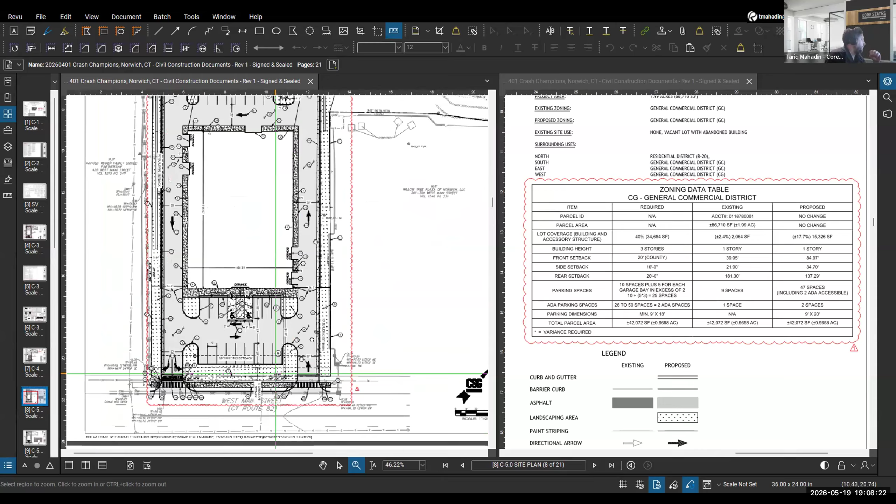Before I start, I'll give a quick brief on where we're at and what we're proposing. As you can see, the project is Crash Champions, a repair facility for vehicles. It's a retail business. We're proposing an entrance from West Main Street on the east side, and we're proposing the exit on the west side.

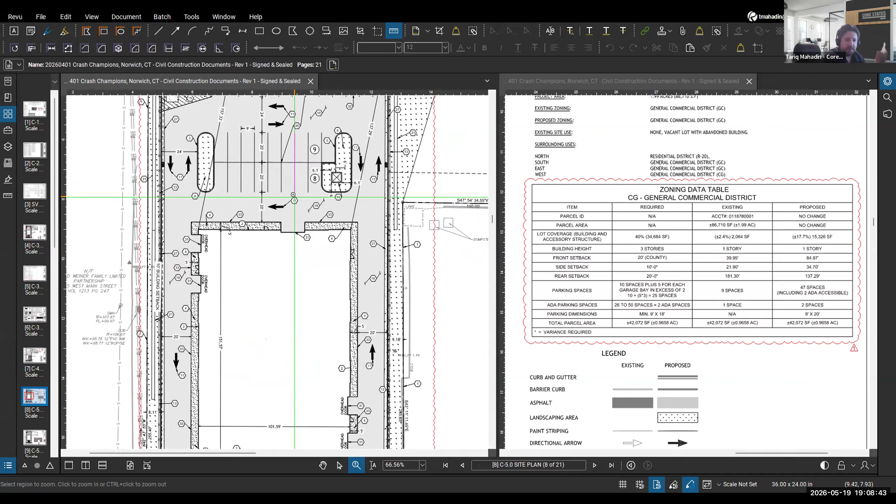We're proposing some parking spaces in front of the building, as you can see right here. And this is the proposed building. We have some parking in the back for vehicles being repaired or pending for customers to pick up. We will have some fencing, and we're proposing an underground stormwater detention system.

We started conversations with city staff about two months ago. They've been phenomenal, outstanding, and quick in communication, with constant feedback on the city codes and what's required. We received some extensive comments, very detailed and thorough, on improvements specifically toward aesthetics, landscaping, and the storm design system. We're still going over those and working on them. If anybody has any questions, please let me know.

We're expecting to resubmit our civil plans and landscape plans within 2 to 3 weeks. We've been back and forth mainly because of that underground detention system, and due to the existing soil conditions, we are revising the storm design.

Give me just a second, I need to share a different PDF, this is just the layout. This is a quick example showing how it was before. Our proposed system is currently extended and enlarged, as you can see here, and we're still working with the city engineer, Mr. Jeff Dewey.

If anybody has any questions, please let me know. Or Frank, thank you.

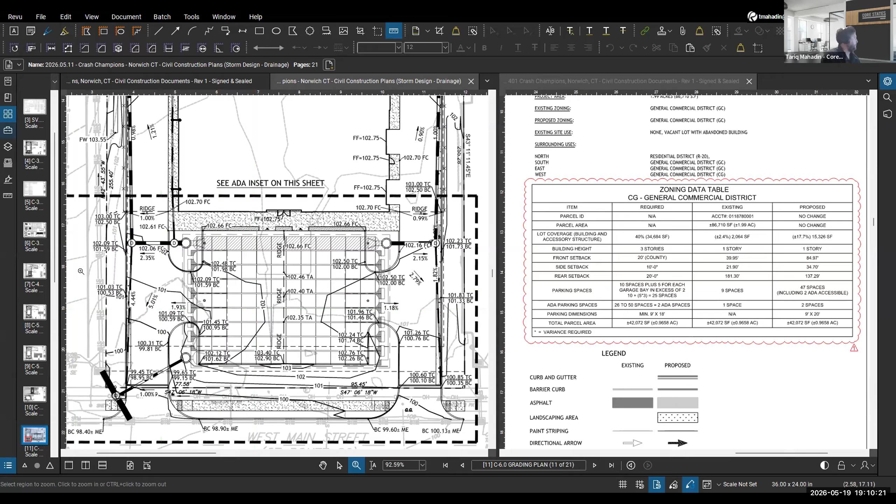Just quickly, this is the old Jiffy Lube place, correct? I believe so, yes. And here is the existing Jiffy Lube. I have a quick survey showing what we're trying to take out and how it's going to be more properly designed.

So I have a question - you said you have more revisions to make. So are you not ready for the commission to review this at this point?

Kathy: I can address that, go ahead Dan. Tariq: So we've had extensive meetings with them, myself and Jeff Dewey, and we're okay with the commission approving it tonight. They're going to address things post-approval that Jeff is okay with and I'm okay with at this point. We've had back and forth for 2.5 months now, and the main issue was the stormwater system. Jeff communicated with me that he's fine with it being addressed post-approval. And for the record, Jeff is a city engineer. Yes.

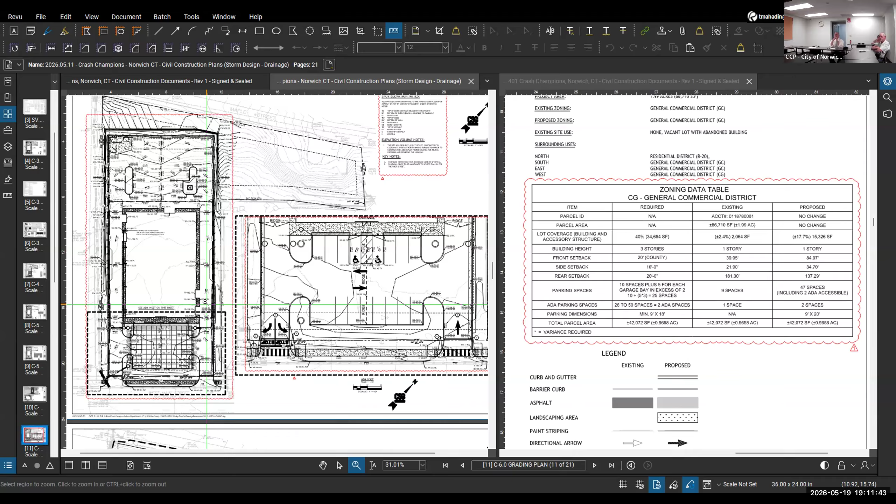Where is the employee parking?

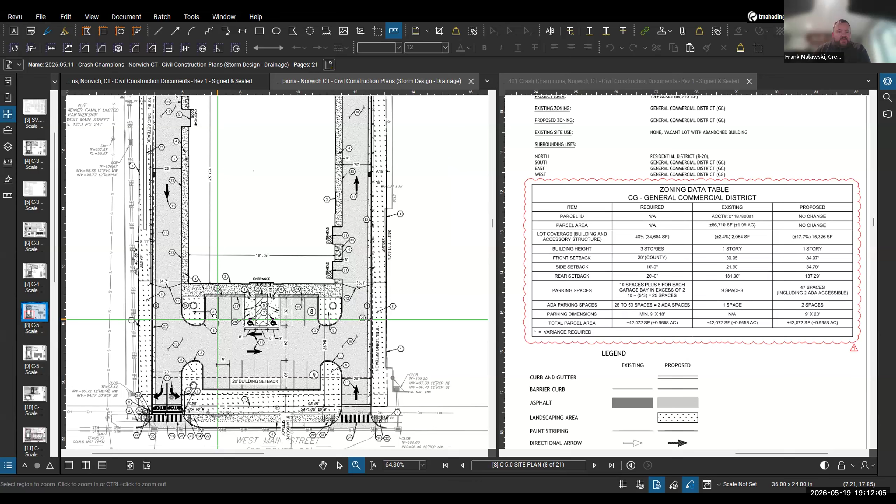Frank: Yeah, you want to take it? Definitely, employee parking is in the front of the building along with customer parking right there. And if you see the two gates on the left and right side of the drive aisles, that in the rear is the storage area. So if you could move up, Tariq, there's the storage for the vehicles in the back there.

Any other questions? Tariq, do you have the elevation views you could show the commission again? It's been a couple months now.

Actually, the architectural elevations. Yes. Frank, do you have those? Give me just a second here. I think I do, yes I do. I'm going to go ahead and share my screen if that's fine. Thank you.

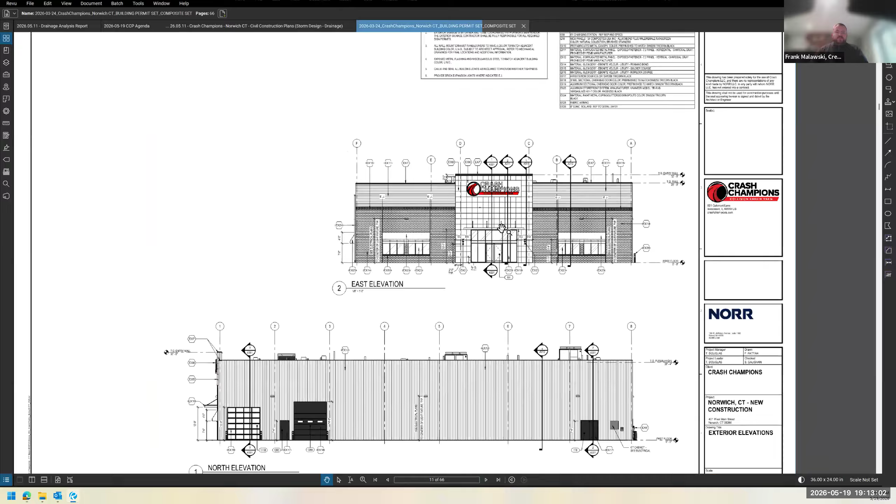So this is what the front elevation looks like. Everyone can see that? Okay, so that's the front elevation. It's a brick facade. And then the side elevation looks like that. And then the rear of the building, that's what the rear looks like, and the other side of the building.

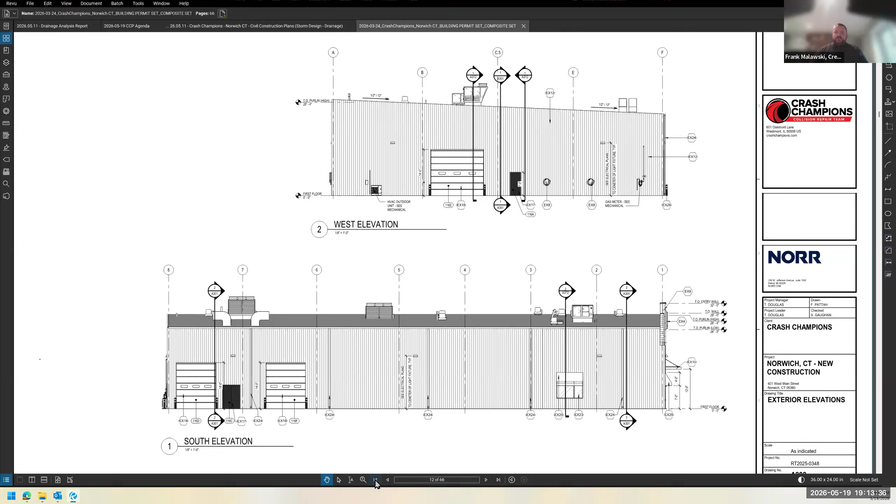So this is a tear down of the existing facility in a brand new building? Correct. And do you have the color for the sides of the building? The sides of the building are metal. Yes. Thank you.

This is strictly collision repair? Correct. The full list of services are aluminum, hail, dent, auto glass, auto paint, paint scratch, bumper repair, fender repair, paintless dent repair, windshield repair, and replacement.

Is there anybody else here to speak on behalf of the applicant, or in favor of this application? Is there anybody here who wants to speak in opposition to this application? Last time, is there anybody who wants to speak in opposition? Okay, hearing none. Staff, you got your report?

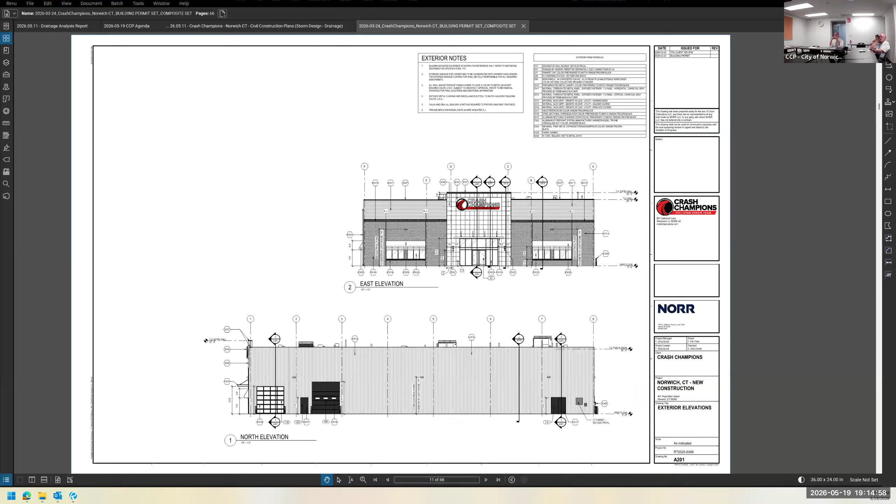Sure, give me one second please. So I'll just run through my memo real quick.

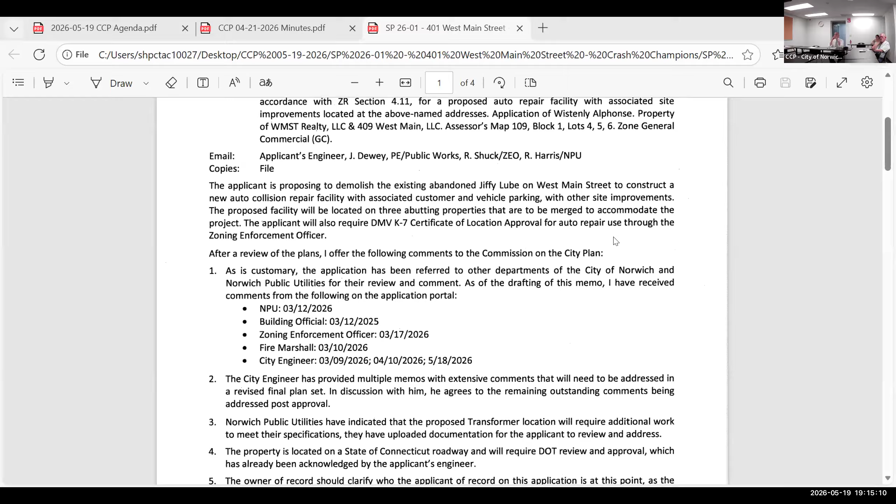We've had extensive back and forth with the application team. All comments have either been addressed at this point. There are a few outstanding that, as I mentioned earlier, the city engineer and I are both fine with them being addressed post-approval.

They are coordinating with DOT. Just one point of clarification: the owner of record needs to clarify who the applicant is on the application at this point, as the original applicant has been removed from the project.

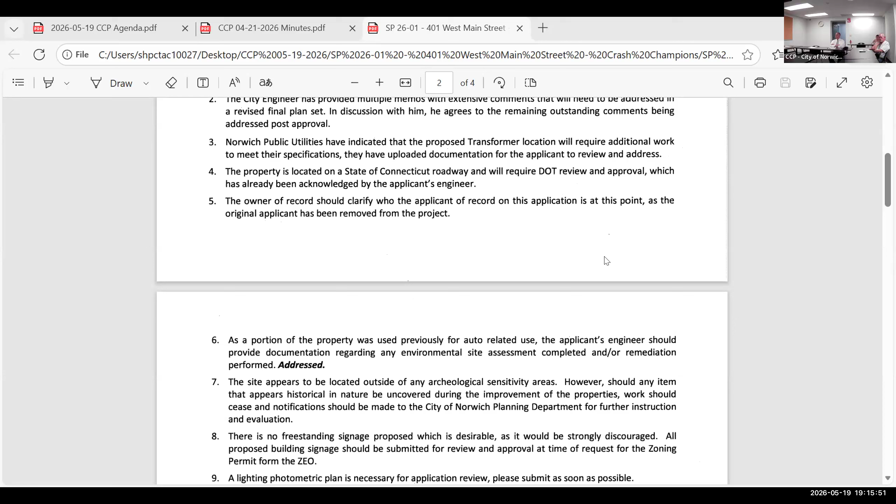I don't know, Frank. Oh yeah, it's going to be me. I'm so sorry, I should have told you that, Dan. Okay, if you could just send an email saying that, and then we can correct it in our portal. My apologies, I will take care of that.

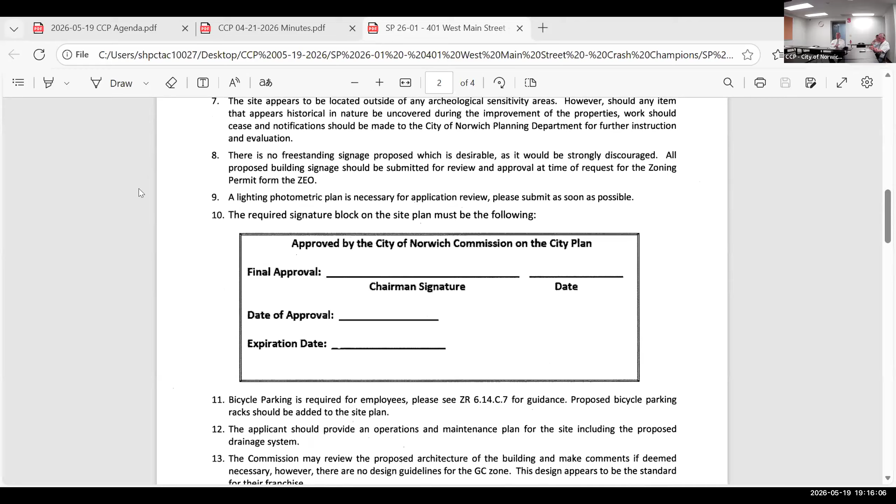Thank you. There's no freestanding signage proposed, which is desirable for the location and building layout. We need a photometric, and need to add some bike parking for employees in the back.

And then you're working on the drainage system, an O&M plan for that. The landscaping plan has been updated since the drafting of this memo.

I don't remember if you went through the 10 special permit criteria a few months back, so we should probably go through those again for the record tonight. And then I have some conditions for approval, so should someone make a motion, but I'll hold off on that. If you want to go through those criteria real quick, they are somewhat repetitive, so you can paraphrase -- you don't have to read verbatim every answer.

Can you do that, Mr. Mahadin? Can you go through those criteria? Yeah, I'm good with going over them now. Okay, just want to make sure. I can bring them up on the screen for you. Okay, got it.

Do you see that? Yes, I see it. Section 7.4.C.8. Yes, we are making improvements on that. Point 1, clear. And Frank, you can interrupt me if you have any comments.

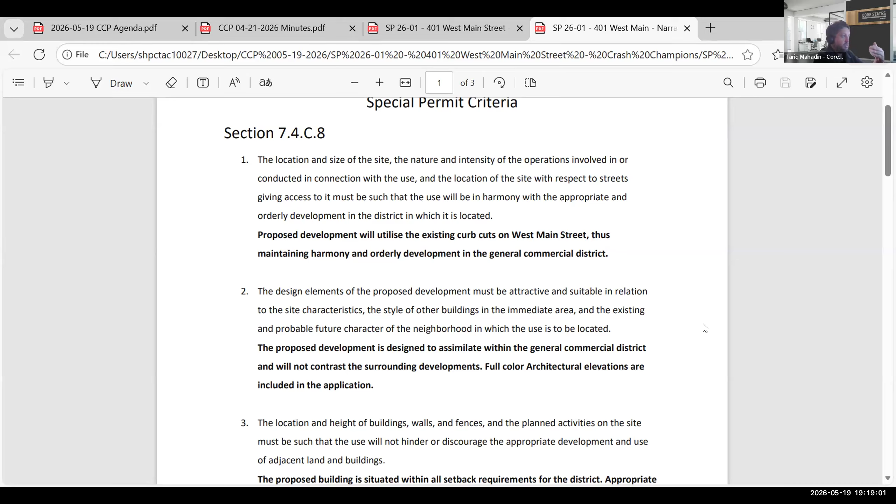Point number 3, the location and height of the buildings, walls, fences must be such as will not hinder or discourage appropriate development and use. We'll talk to the architects, Frank, about that to assure them that we have a proposed building that meets this comment. Yes.

It's appropriate. The proposed use or activity must have no adverse effect upon the neighboring area. No, we are not expecting that. There is no exposed artificial flashing, no loudspeakers, and no repairs will be conducted outside -- everything is going to be inside the facility. Is that correct, Frank? Correct, everything. And just a quick point for everyone: we have 2 bays accessing the site, that's why, to make sure all the vehicles are maintained inside. The design, location, and specific details.

Yes, the proposed development is eliminating one of the existing three curbs. The proposed use and activity will not adversely affect traffic. No traffic conflicts are expected.

Frank, do you concur with this? Correct. Existing and proposed streets, driveways, size, and condition have capacity to accommodate the proposed use. Yes, and we're also coordinating with DOT through the radiuses and driveway improvements using their state standard details.

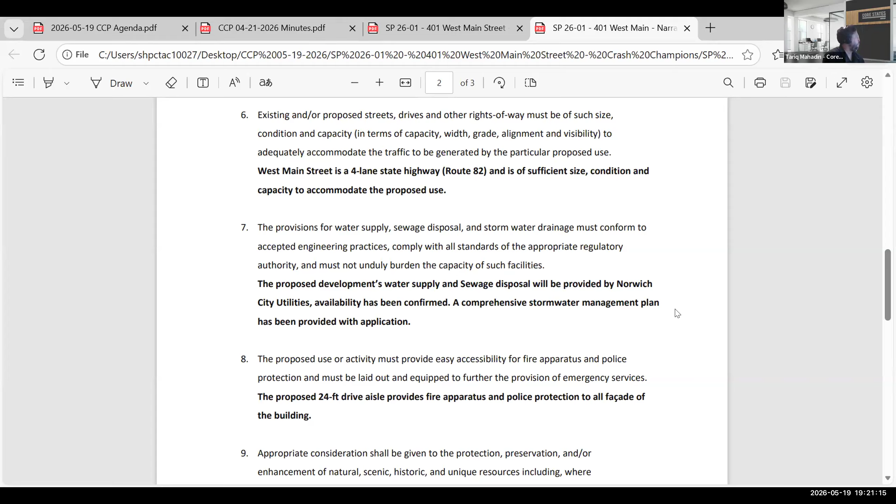Point number 8, proposed use and activity regarding fire apparatus. Yes, the proposed 24-foot drive aisles provide for fire apparatus. We're proposing approximately 24 feet and will make sure those are visible.

Appropriate consideration shall be given to the protection, preservation, or enhancement. This refers to the landscape architecture comments. One of the comments we received is not to focus just on the entrance - the city recommended we also look into the back of the property, and we are working on that too.

Point number 10, adequate provision and demonstration that the proposed development will properly maintain. Yes, the proposed development will be properly maintained to uphold the brand's image and reflect the City of Norwich standards. I concur and confirm. That's it. Sorry, I tried to go as fast as I can. No, thank you, that was great.

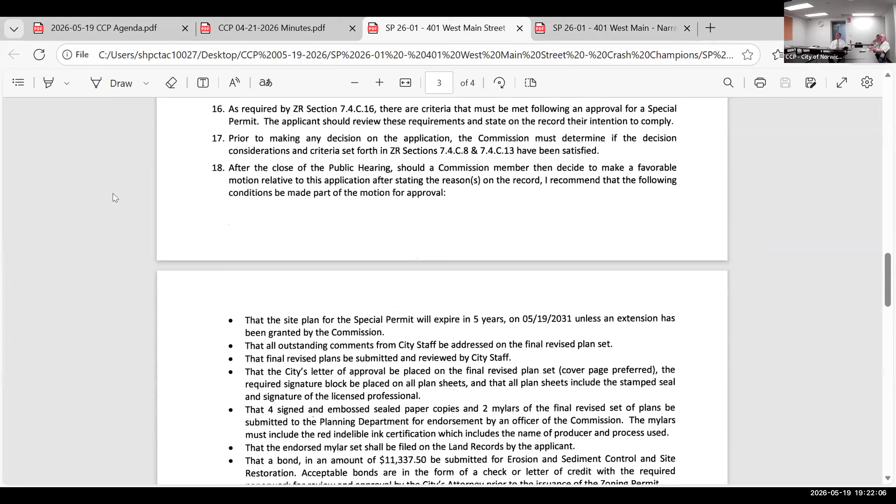Just back to my memo, I have a number of approval stipulations here that I have to waive the reading of, but I'll provide them to the clerk. For the record, I have some suggested reasons should someone make a motion for approval. I'll quickly show you the exhibit list so I don't have to read it, but it's on the recording and will also be provided to the clerk.

Switching back to the memo here, I would add one more item as part of the motion: this approval would expire and supersede special permit 23-09. If you remember, a few years back those of you on the commission approved a similar use here for the same type of business. It was a different company, a different group, but if this is approved tonight, it would supersede and expire that permit.

The design was completely different, so they wanted to come back and move forward. All right, that being said, I think we can probably have a motion to close the public hearing now.

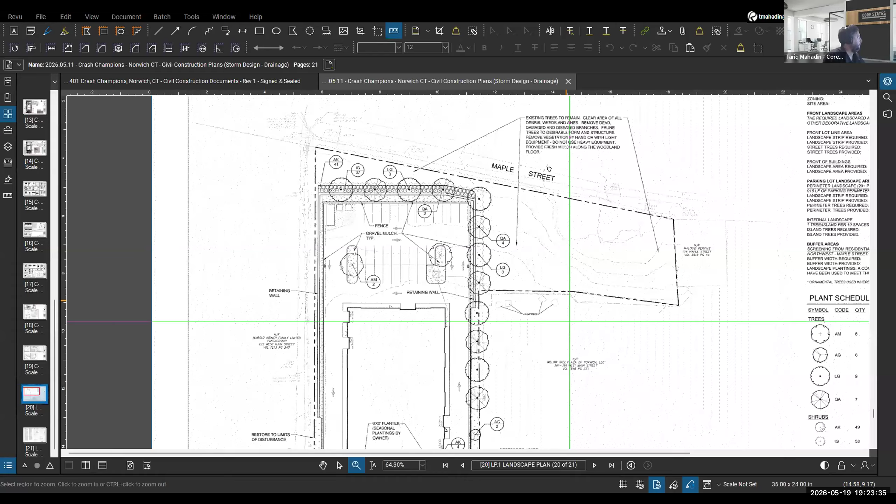Can I ask a question real quick? Can I just see the landscape plan? Of course, let me see if I have it here. We're still working on it - it's not even finished, but we're making it more complete. Give me a second, I am sharing my screen. Can you see it? Yes.

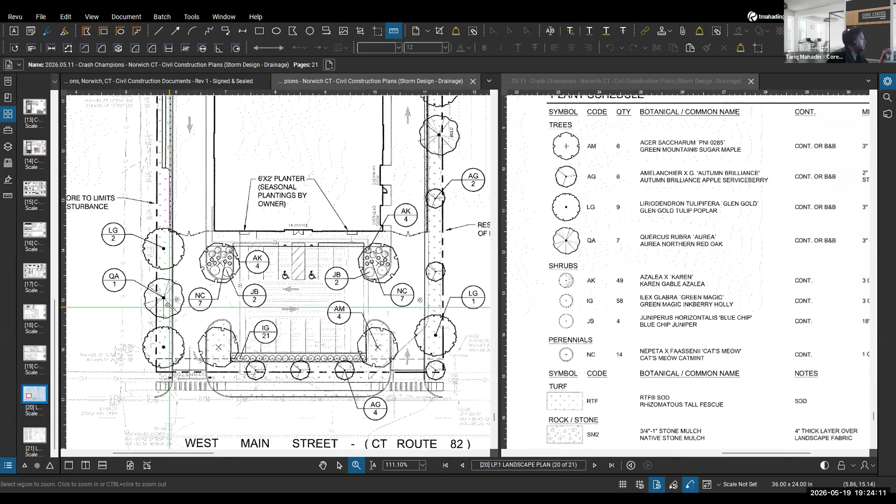What do we have there? Give me a second, I can pull up the tree list right here. I'm going to do a split screen to show what we're proposing on the south side, at the entrance of the property. We have some Glen Gold tulip poplar, some Acer Green Mountain maple trees, and we're also proposing some Quercus rubra, or red oak, as you can see here.

I will go into the back now. We're proposing some shrubs, listed on the right side on my screen, and I believe it's Juniperus horizontalis, the blue chip juniper. We're proposing some of those here, along with two different ground covers and some sod.

Also, we're proposing some mulch - native stone mulch. In the back, as you can see here, sorry if I didn't go through the design detail earlier - we do have some retaining wall, but we're also providing screening plant material. We have some red oaks here, some gold tulip, and some apple serviceberry.

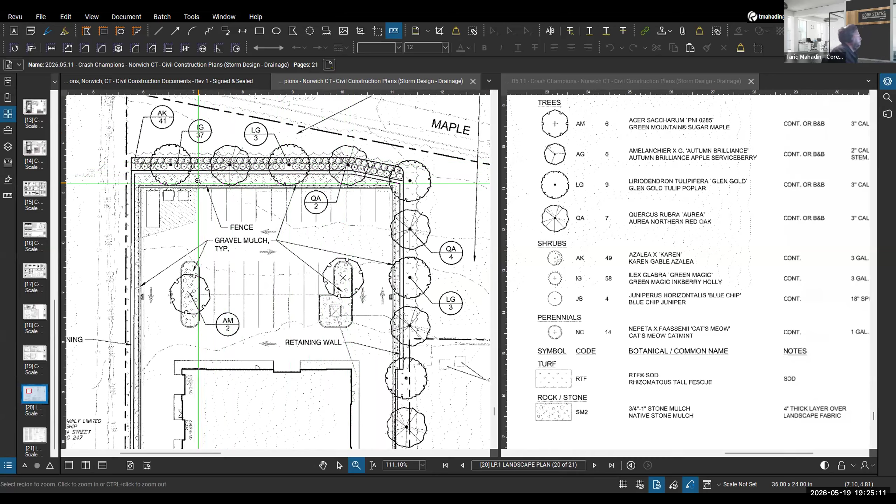And we're going to have an irrigation plan too. Sorry to interrupt, so Maple Street is a residential street, and that retaining wall - how high is that?

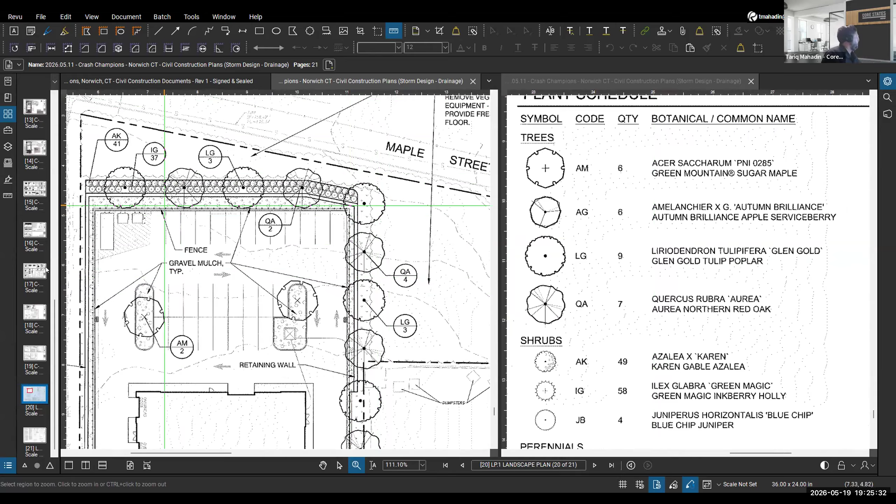It's not finalized, but I do have a grading plan here. Like I said, we're revising a few things. I don't need to know exactly - I just want to make sure I don't give you an odd number. I have it between 5 to 7 foot, it ranges in some areas.

We're trying to. So are you going to have a fence back there? Yes, a 6 foot tall fence in the back. What type of fence? It should be like a white vinyl fence.

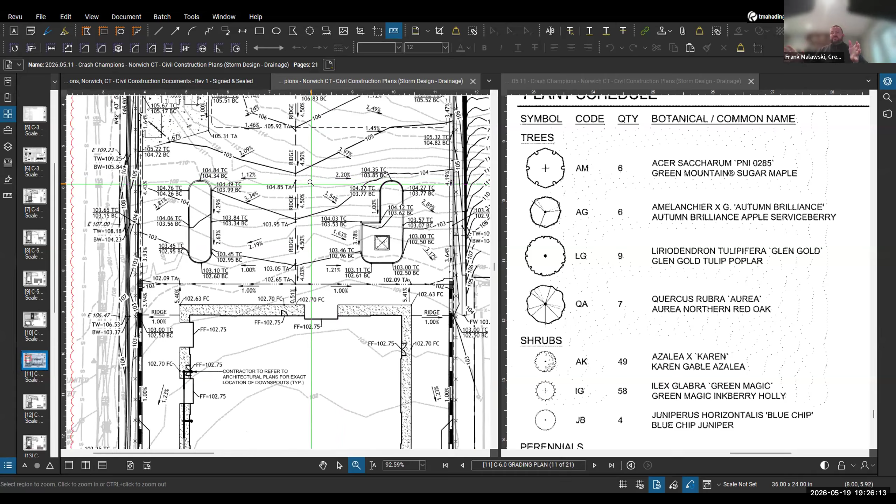And it's wrapped around essentially the entire back end of this property, right? Think of it like an upside down U all the way up until you get to the front, enclosing those two side drive aisles. So you'll see the trees and landscaping more so, and you'll see the fence too - that should be good for screening.

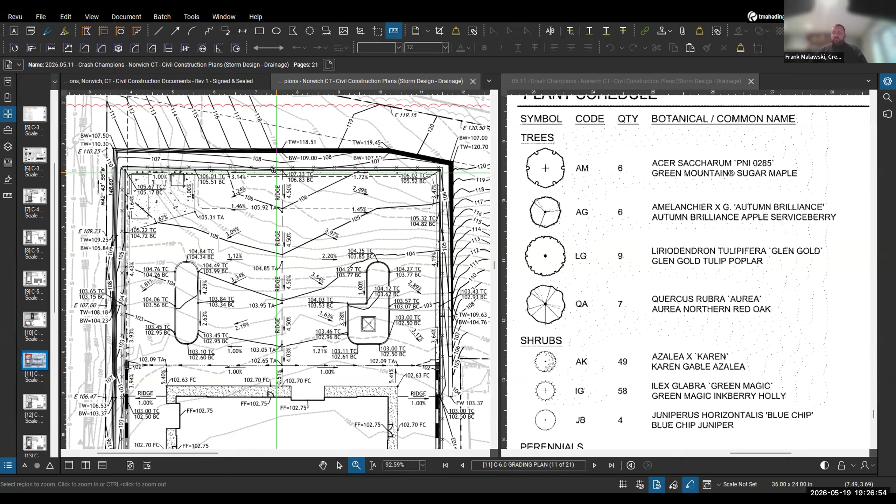We did also receive recommendations 2 months ago when we had meetings with city staff - Dan, Diane, and I forgot the third person, my apologies. They were emphasizing a lot more on the landscape requirements, making it more aesthetic, not just meeting the minimum requirements. The client was immediately supportive of the idea, so like I said, we're still working through those to make it more aesthetically pleasing.

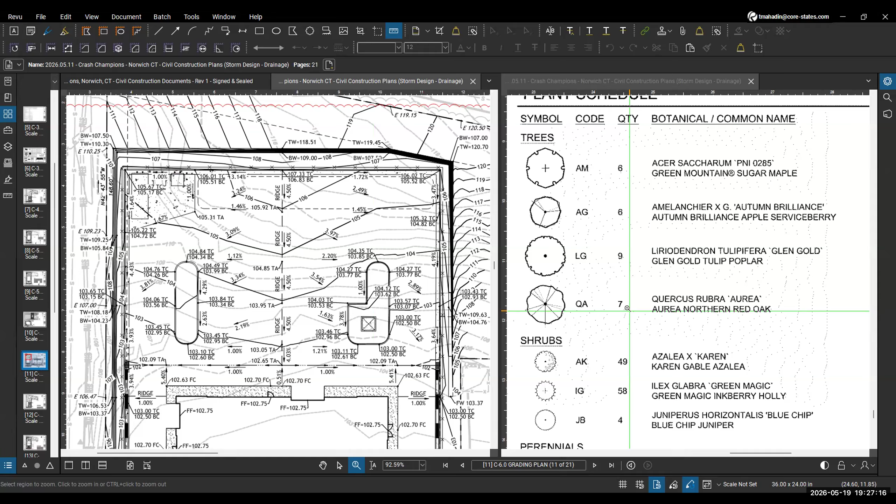So I would be concerned for Maple Street - people seeing this from Maple. Sorry, that was my phone, my watch. Yeah, I would be concerned with what people will see from Maple Street.

So Kathy, their landscaping buffer that they provided meets the new zoning regulations. It's a pretty extensive buffer with the fence and the plantings and the existing trees that are up there that are worth saving. We've worked with them to ensure that it's screened properly.

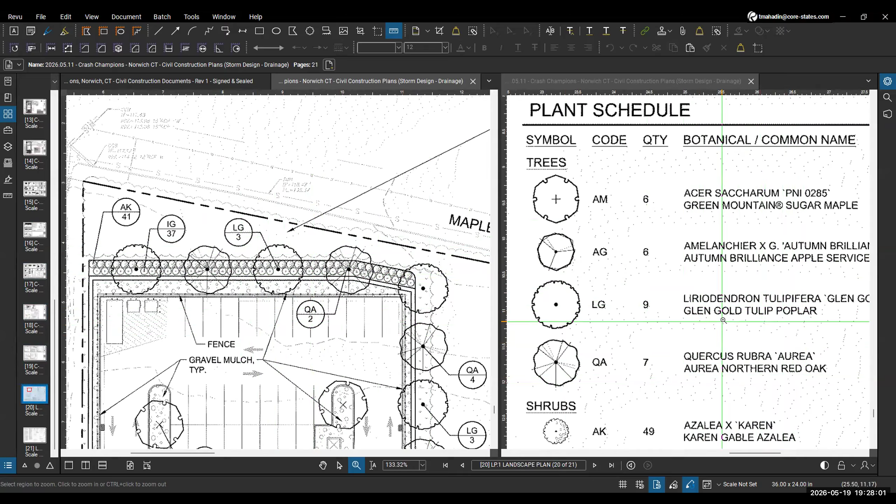So it's going to have a 6-foot high fence and then tulip plantings, trees, did you say? I have the trees listed here on my right side, with the symbols and abbreviations. Maple, QA, that's the red oak. The LG is the gold tulip. I have the IG right here, and those shrubs on the screening are the small ones here - the green magic inkberry holly, and another shrub, AK, which is the Karen Gable azalea.

The trees don't provide really a solid buffer, but I think with the fence there and the trees, it should be good.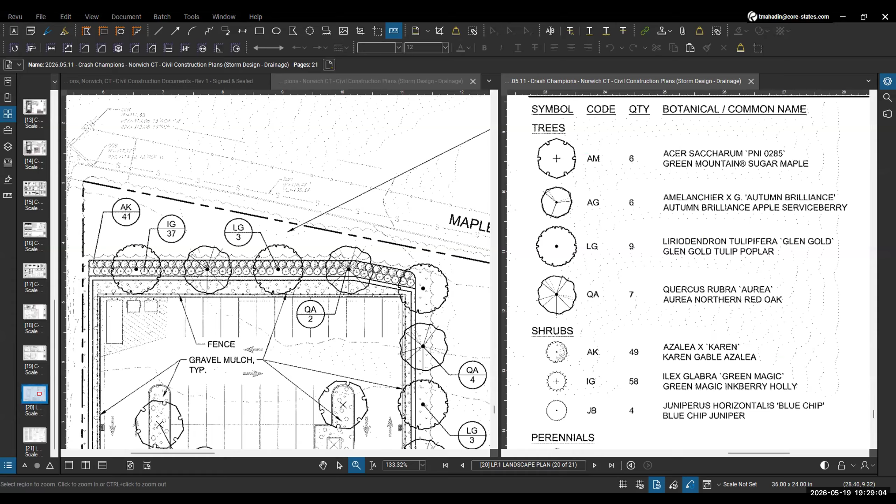Okay, I can give you some feedback on that, Kathy, because that's kind of my neighborhood and I live close to this area. It's kind of a steep hill that would go down the back of this property, and the existing tree line that's there is a pretty good buffer now. I think with adding the additional planting, the back of the building will be well hidden for any of the residents on Maple Street.

Thanks, Ella. And I would also mention that the retaining wall is also an added feature, right? With the elevation change too, that helps. Absolutely, thank you very much for explaining that to me.

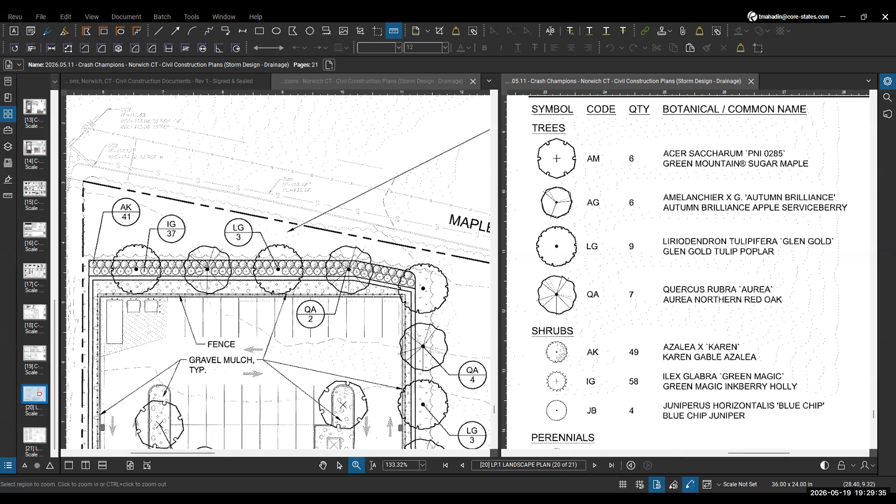I have a question - exiting the building, is it both left and right hand turns? Is it left, coming out - will you be able to make a left turn and a right turn if you need to, or is it just a right turn only?

Let me share my screen. I think Tarek might have dropped with a connection issue here. I can show that quickly. The question is regarding traffic coming out of the shop - I think he heard you. Tarek just got dropped from the meeting, so Frank's going to answer the question.

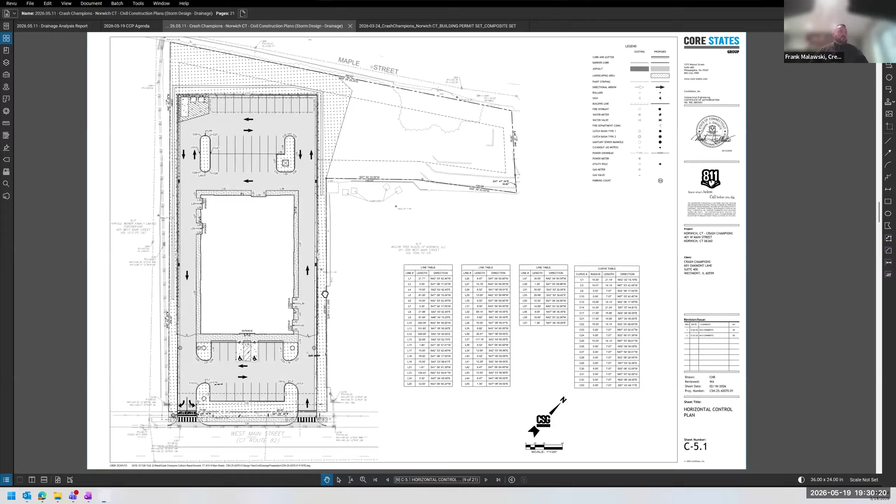Yeah, so we have one drive access coming into the property, and then one drive leaving the property. And they can go either way? Left and right, correct, when exiting. Is the question regarding exiting or entering? Exiting. Yeah, either way. So Dennis, I can provide a little more to that though.

That answers my question. Thank you. All right, any other questions?

My apologies, I got kicked out. I got disconnected, my apologies. I'm back. You're good, Tarek, I was able to answer the question. I think we're good.

So this is big, and I just have a quick question. I noticed that the lighting plan hadn't been submitted yet. Is that going to be coming, and is the CEO going to review that?

Yes, and we received it as a comment about 1.5 months ago. The reason why we haven't submitted it, I want to make sure our layout is 100% finalized, addressing all the comments, parking, landscape, you name it. I will immediately propose the photometric plan, and I will include it in our submittal.

Great, thank you. Thank you.

All right, anybody want to make a motion to close the public hearing, please? This is Ella, I'll make the motion to close the public hearing. Do we have a second? This is Kathy, I'll make the second to close the hearing. Okay, we have a motion and a second. All in favor? Aye. Okay, so the public hearing is closed.

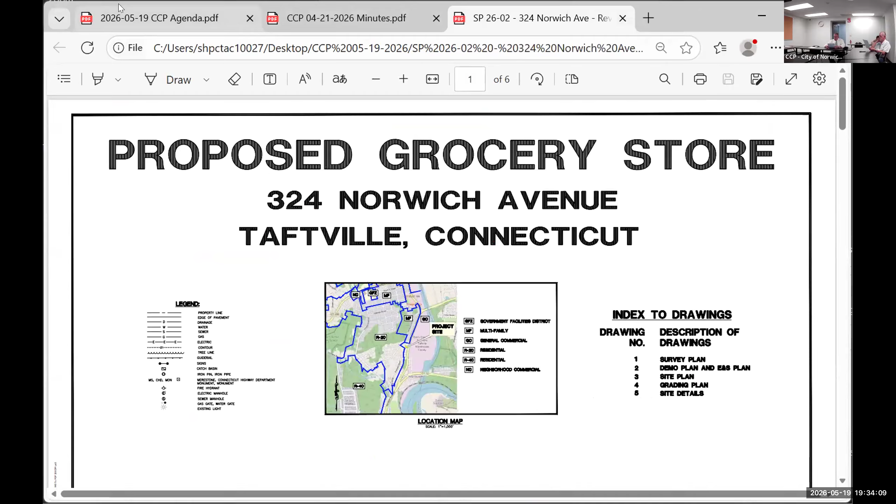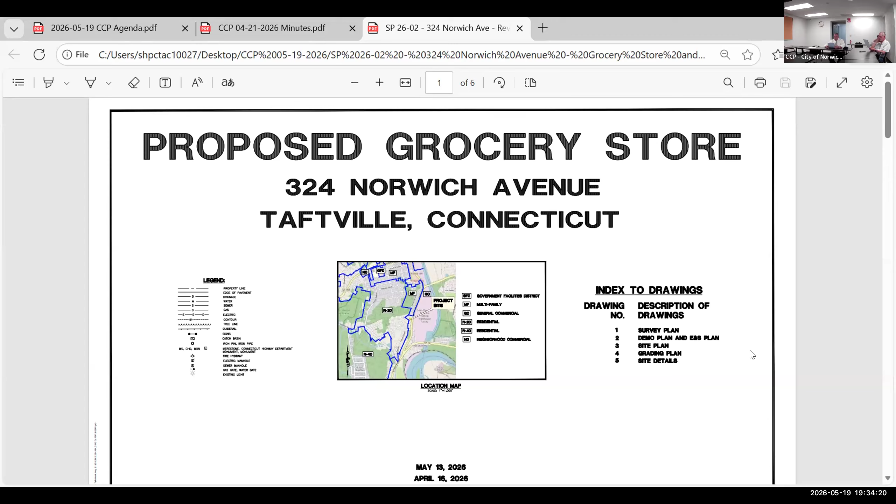Next matter on the agenda is special 2602, 324 Norwich Avenue. It's a request for a special permit in accordance with zoning regulation 4.1 for a mixed-use building with a proposed grocery store and one residential unit on the upper floor. The application and property of Jehu Lecante, Assessor's Map 55, Block 2, Lot 2, General Commercial Zone.

This was tabled from April 21st. I don't think we opened the public hearing then, did we? No. Okay, so does somebody want to make a motion to open this public hearing? So moved. Okay, was that Dennis? Yes, sir. Thank you. Do we have a second? This is Ella, I'll second. A motion and a second to open the public hearing. All in favor? Aye. Okay, so public hearing is now open.

Is there somebody here to speak on behalf of the application? Yes, this is Ellen Bartlett with CLA Engineers. We're located at 317 Main Street, Norwich, and I'm representing the owner and applicant. And I believe he's here in the audience if we have any questions for him as the project goes.

As was stated, the project is located at 324 Norwich Avenue, and it's in an area of the city where there is limited options for purchasing groceries. The site is presently developed as a two-story residential building containing 2 apartments, one on each floor. The special permit proposes to convert the first floor apartment into a neighborhood grocery store and maintain the second floor as a single-family apartment.

The property is zoned general commercial. A mixed-use building is allowed with a special permit. The retail store is allowed with a zoning permit. And because there is an apartment upstairs, we're here for a special permit.

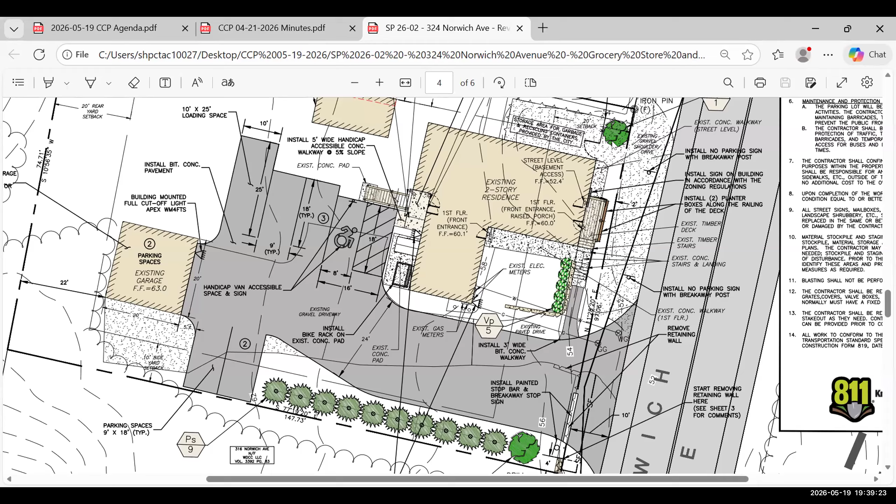Okay, hearing none, is there anybody else who wants to speak in favor of the application? Anybody who wants to speak in favor of the application? Last call, anybody else want to speak in favor? Hearing none, anybody wishing to speak in opposition to this application? Anybody wishing to speak in opposition? Third time, anybody wishing to speak in opposition?

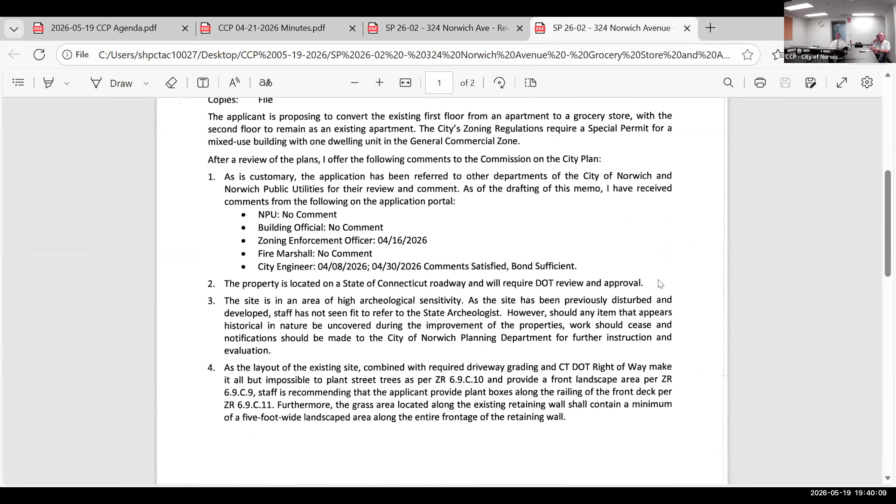Okay, hearing none, I'll ask for a staff report. Dan? Sure. As Ellen mentioned, all of our comments have been addressed at this point, the city engineer and myself. We got the second DOT letter this morning. She did discuss about the trash and recycling, storage and pickup. They did add some additional landscaping based on my last memo.

Ellen, if you could go over the 13 special permit criteria, kind of how we did for the last application. You can kind of paraphrase that. You don't have to read it all verbatim. Okay.

There's 13 criteria, and the first one is by redeveloping this existing commercial residential property, the project is consistent with the current Norwich Plan of Conservation and Development's growth strategy. We're promoting economic development and investment to support community vitality and stability. We're supporting a range of housing opportunities and choices and promoting appropriate development patterns, mixed uses, which is recommended.

Number 2, the proposed development is a mixed-use commercial residential and has been in harmony with the development of the neighborhood.

Number 3, the exterior of the existing building is not going to change substantially aside from some landscaping upgrades in the front of the yard. The height of the building will not change and no new walls are proposed. As the site is already developed, the proposed improvements should not hinder or discourage the appropriate development or use of adjacent land and buildings.

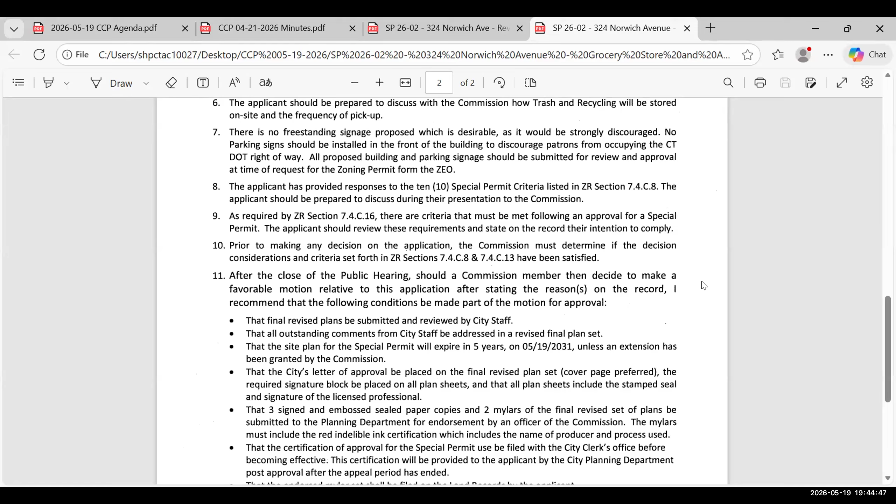Okay, I think that's pretty much it for my memo at this point. I have some conditions to go with the approval here and some suggested reasons if someone should choose to make a motion for approval. That's to waive the reading of all of it. And I will show the exhibit list here on the video, and that's to waive the reading of that as well. I will provide it to the clerk for the record.

That being said, can we have a motion to close the public hearing? I'll make that motion, this is Ella. Is there a second? I'll second that, this is Kathy. Okay, motion to close the public hearing by Ella, second by Kathy. All in favor? Aye. Okay, so the public hearing is closed.

At this point, does anybody wish to make a motion to address the merits of the application? I'll make that motion, this is Kathy. Motion to approve the application as it conforms with the zoning regulations, section 3.2C, 4.1, chapter 6, and zoning regulation section 7.4. And I recommend that all of the conditions that the planners have outlined be met in their memo.

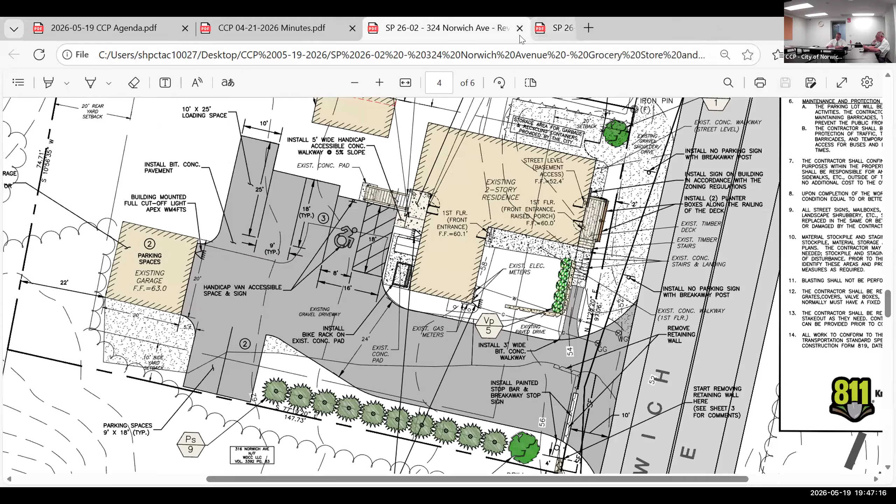Thank you. Thank you, Ms. Bartlett, thank you for your time. Thank you, everyone. Thanks, Bob. You're welcome.

Okay, so moving on under new business, we've already postponed the Broadway application 26-03, so that's coming up again in June. And then on to special permit 2605, 612 and 620 West Thames Street. Request for a special permit in accordance with zoning regulation 3.1B for demolition of an existing single-family residential structure and outbuildings to construct a new multifamily development for a total of 40 dwelling units in 2 buildings with associated site improvements. Application and property of Belwinder Singh, Assessor's Map 129, Block 1, lots 24 and 24.1.

It's a multi-family zone. So can we have a motion to open a public hearing on this matter? So moved, Dennis Jenkins. Thank you, Dennis. Do we have a second? This is Ella, I'll second. A motion by Dennis, second by Ella to open the public hearing. All in favor? Aye. Okay, public hearing is open.

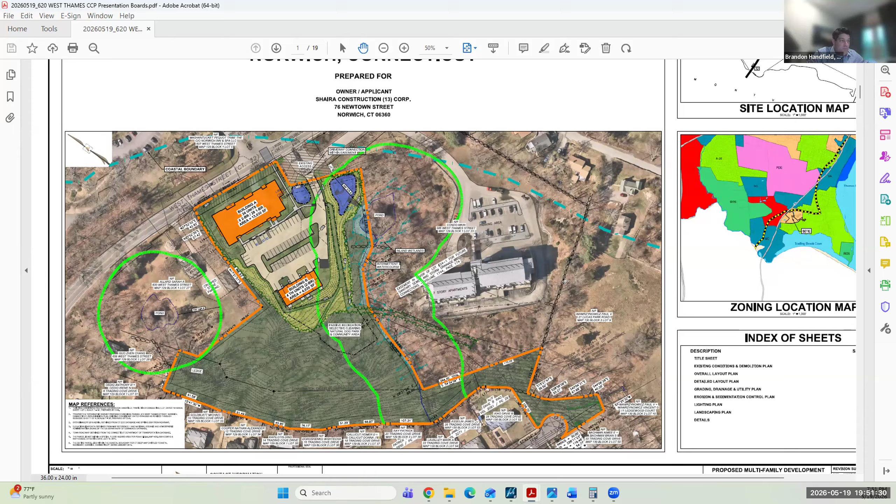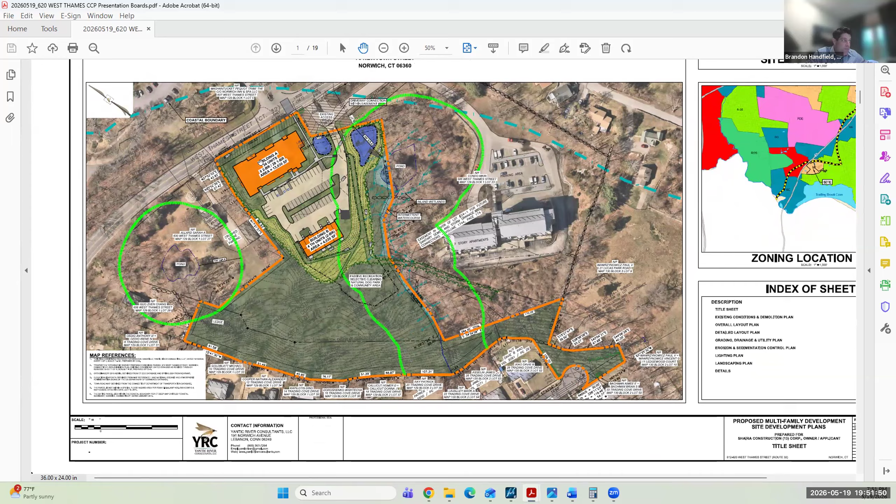So our site here is outlined in orange, with frontage on West Thames Street to the north. To the right would be the Cove View condominiums, an existing multifamily development, I believe a 7-story building with access to West Thames. Moving counterclockwise, the property abuts residential properties to the south along Trading Cove Drive, which intersects back out to the west with West Thames. Continuing counterclockwise, we also abut residentially developed properties that have access to West Thames Street, and last, across the street would be the Norwich Inn and Spa.

And again, that coastal area boundary is just to the north of our site, so we're fully outside that boundary.

The first sheet I have for you is the existing conditions plan, which is our survey prepared by CHA, overlaid on top of a 2025 aerial, so you can see what we have for improvements. Again, the boundary is outlined in orange here with the frontages, so it's the same orientation, with Cove View to the right.

There are a number of easements on our property or in favor of this property, highlighted in yellow. I'll start with the one along our frontage on West Thames Street. This was granted as a sightline or grading easement in favor of 586, Cove View, for the purpose of providing sightline improvements for their existing driveway. We'll get into the fact that we are proposing to do that as part of this application.

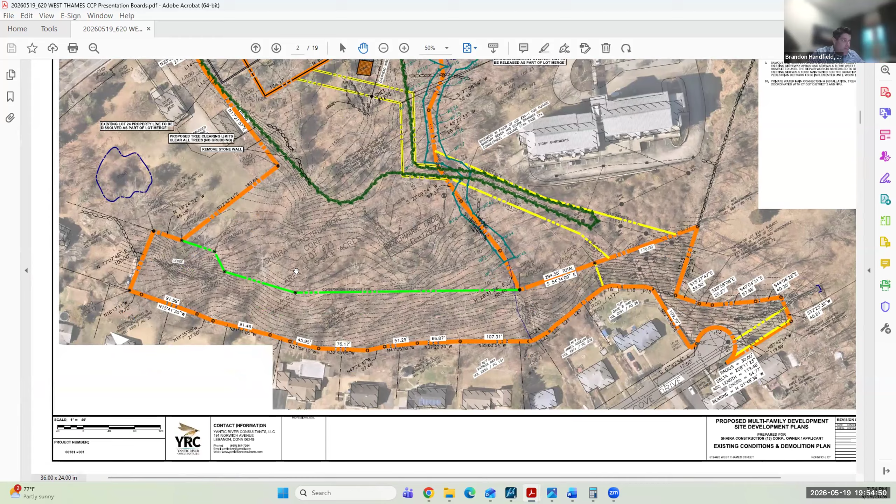Going to the use of the property, what you see in gray and orange are all the existing improvements currently on the property today. We have the single family home on West Thames Street, the driveway serving that existing home with direct access to West Thames, and a few outbuildings. A portion of this appears to be remnants of a house that used to exist here and was likely demolished as part of the construction of Cove View condominiums, so that garage still exists along with a portion of the driveway.

There's also a retaining wall along the entire frontage of this property on West Thames Street with some pretty dense screening vegetation that also limits the sight line. All of those improvements will be demolished—the houses, the driveways, the septic, the retaining wall along Route 32, as well as all the vegetation—to provide those sight lines. That's part of the easement.

The last thing I'll point out is I show the limit of our clearing in green. This is an overlay of our proposed development to show the limits of what we will be removing. In the area below, most of the front has landscape trees that have matured quite nicely over the past few years, and then there's an area of clearing back here.

That is the location of a former outbuilding, likely an agricultural building. It was quite large, basically stretching in this area. It's no longer there—it was demolished sometime since 2000. So this area is pretty clear, but it has started to grow back in with understory invasive growth.

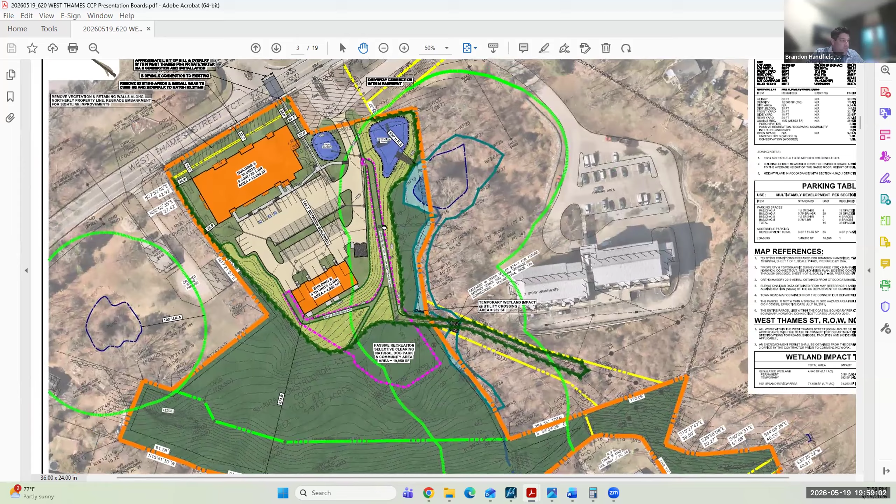This one zooms in a little closer. Again, we have our main access drive connecting to the Cove View condominiums driveway here. We have a circular pattern so you can go in either direction to provide for the parking. The townhomes have parking in their driveways as well as a garage, so each one has 2 parking spaces, with 2 additional adjacent to the end units. The rest of the spaces serve Building A or overflow visitor parking.

Pedestrian access is provided from all of the parking areas into the main door of each building. To the north, serving Building A, we have a sidewalk along our parking areas going into 2 doors that serve the units and a 3rd door that serves the main lobby. For the townhomes, each has a stoop and steps into their unit. We're also proposing to connect this sidewalk to the existing sidewalk along West Thames Street, along Route 32, and connecting across our driveway to the recreation path that leads below.

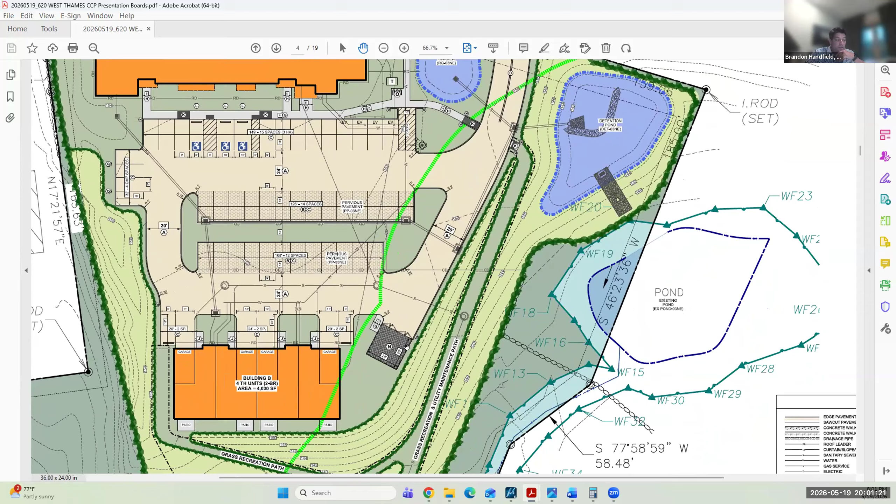The last thing to cover on this sheet would be our trash enclosure. We do have one trash enclosure to serve both buildings. It is fully enclosed as well as a concrete pad with gates and also a pedestrian access so people can walk or drive their trash to that area.

I won't spend too much time on grading, drainage, and utilities, but the purpose of this site was to generally balance the materials on site. There will be a cut on the westerly boundary, about halfway through building A and up to building B, and everywhere to the right will be a fill. Our driveway is basically on that cut fill line right through here.

Stormwater management will consist of collection on our site, treatment, infiltration, and detention before we discharge at the northeasterly corner of our property. There is an existing pond and wetland area in this location that is partially on our property and partially on the Cove View condominium property.

Our system fully treats our stormwater in accordance with the 2023 Stormwater Quality Manual, and also attenuates peak flows for up to the 100-year storm before we discharge from our site.

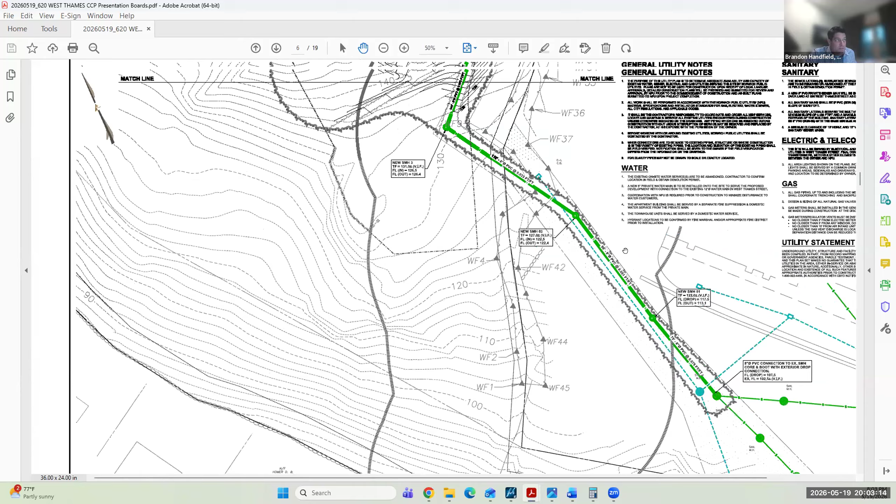Sewer is available to us at the southeast corner of our site through that easement onto the Cove View property. We will be connecting to an existing sewer manhole just to the south of the Cove View condominium building. We'll be running a new sewer main within that easement in a northerly direction up to our property, within that landscape trail, then brought up onto the top platform where we'll serve both building B to the south and building A with laterals.

Water is available to us in West Thames Street. There is an existing 12-inch water main, actually two water mains, and NPU prefers that we tap into the 12-inch. So we are crossing West Thames Street with both domestic and fire suppression connections and bringing them onto our site, where it will serve building A with fire and domestic and building B, the townhomes, with just domestic. Electric will connect to West Thames Street as well.

We do have an erosion sedimentation control plan in compliance with the 2023 guidelines. There were some comments from the city engineer, Jeff Dewey, that we can address and update this plan in accordance with his comments.

We did submit a lighting plan. There are 9 pole-mounted area fixtures proposed, shown in red throughout the driveway and parking areas. The fixture itself is a Lumark Prevail LED mounted 15 feet above the top of the base. It is a downlight with full cutoff that is dark sky approved. Our intent here was to provide sufficient lighting for our parking areas to get residents into the buildings and minimize any encroachment off our property. We tried to achieve a minimum of 0.2 foot candles horizontally on all parking areas and our driveway, while limiting any lighting into surrounding landscaped areas or properties.

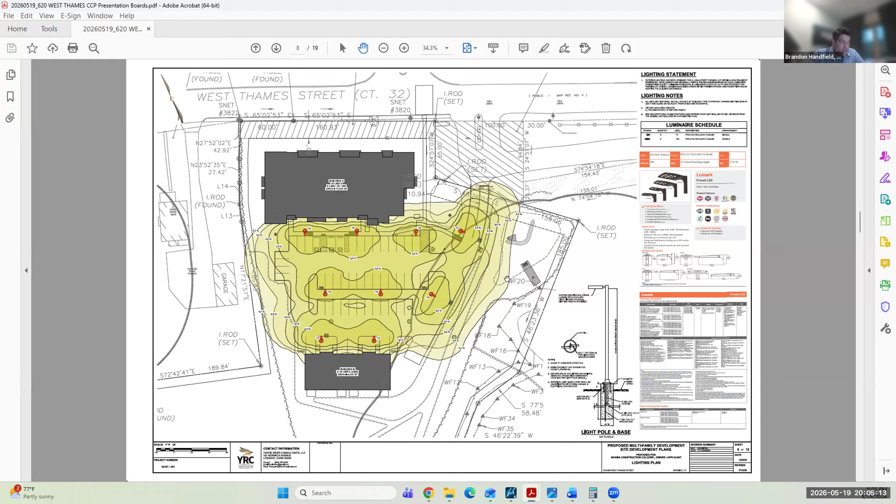Our landscape plan, I have some notes here. We designed in accordance with Section 9 of the regulations. The first and main focus of our approach was to maintain as many of the existing natural trees as we could, specifically to the west and south of our property on the steeper slopes that abut Trading Cove Drive to the south. It's not shown here, but if you scroll up, you can see all this area will be maintained.

So not just the conservation easement itself, but also an additional 100 feet plus of naturally vegetated embankment. The second part of our landscape plan, we have incorporated native plants as much as we could into our plan with no invasive species. The frontage of our property along West Thames Street will be fully landscaped from the building up to the existing sidewalk. This embankment will be regraded to provide sightlines for the driveway, and after regrading it, it will be vegetated up to that sidewalk.

We're incorporating a planted buffer, if you will, that consists of native flowering dogwoods, as well as in between that would be a Cornus sericea, or red twig dogwood, in between to create kind of a hedgerow between the sidewalk and our building.

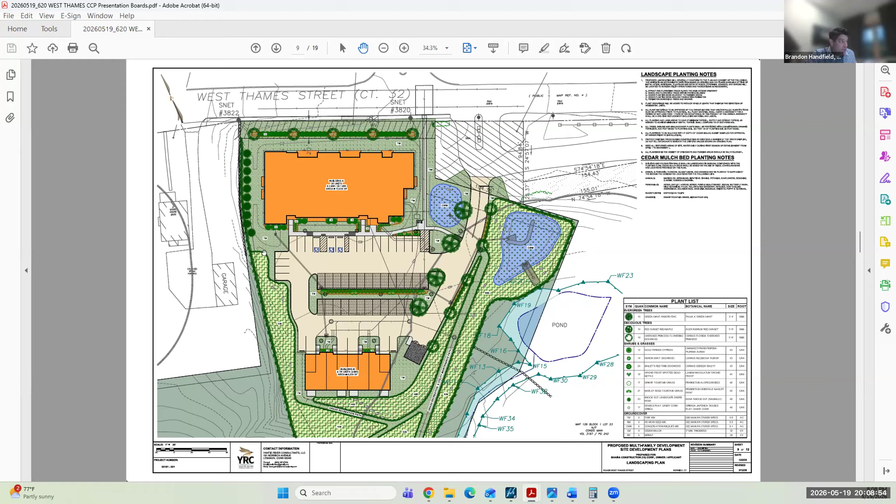You're up, Jack. I just had to unmute.

Good evening, Jack Kemper, Kemper Associates Architects in Farmington. We've been working on this building for quite a while. Our main focus has been the 36 unit building.

As Brandon said, it's 36 units total: 25 one bedrooms and 11 two bedrooms. Nine of the one bedroom units have office spaces near the entry too, so they have a little extra space there.

A couple of the units on either end on the 3rd floor, it's a 3-story building, are really cool loft kind of units with cathedral ceilings. That was designed to react to the new height requirements, and it actually worked in our benefit because the height requirements are now a vector from an angle from the sideline, and we just used that angle to design the building.

We wanted to, when I first went down there, I walked around the Norwich Inn and Spa across the street, which is absolutely wonderful and has great old architecture, and wanted to take some of the elements from there, the gable roofs, the chimneys, and the brick, and incorporate some of those features here. So we wanted to make the building look like it belongs there.

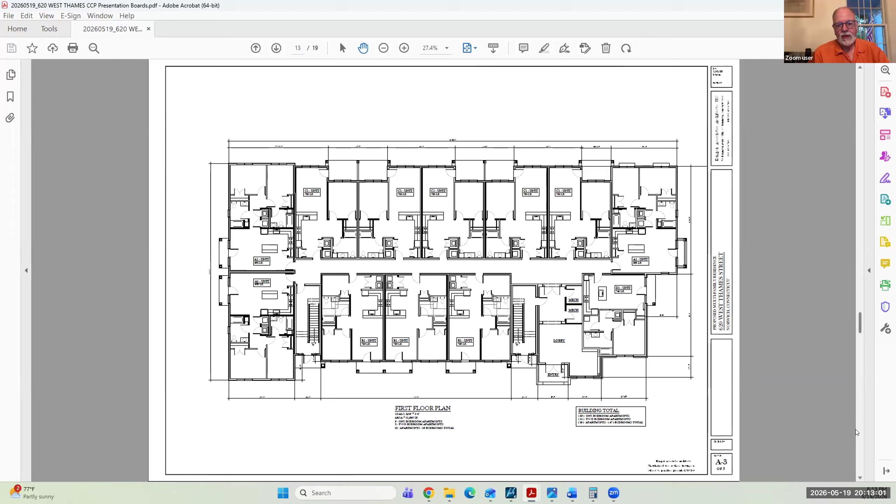They're pretty good sized units, about 1,694 square feet. They each have a garage and little recessed entry front porches. They're designed with an open concept on the first floor, and they'll overlook the nice wooded area to the south of the site, so I think they'll have a nice feel. They're 2.5 bath with a laundry—nice places to live. I'm happy to take any questions; I just wanted to give a short overview.

Any members of the commission have any questions? I do. So you said it's going to have brick, and I saw some brick accent there. What's the rest of it?

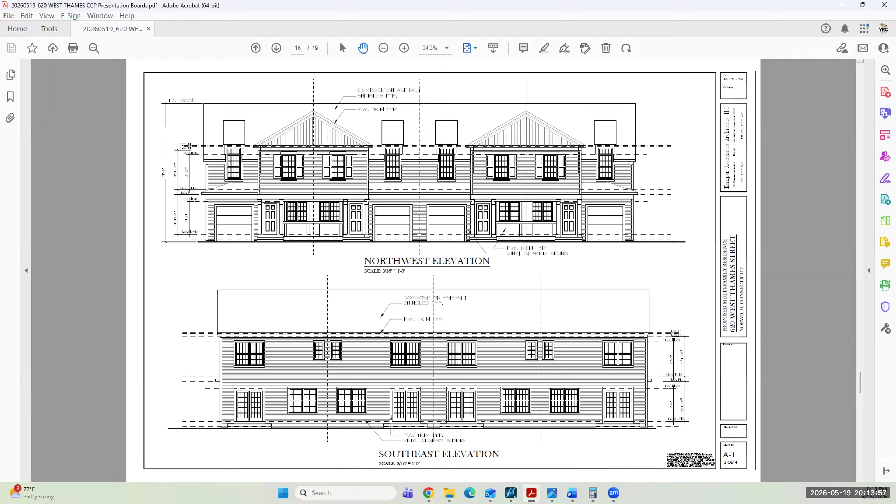The rest of it, we're okay with vinyl siding if it's done correctly. So we're looking at vinyl siding for the clapboards, but we want to use composite trim so the siding goes behind the trim and you don't see the J channel. So the trim is all composite. We're also doing some composite panels connecting some of the windows on the front elevations—you can see that on the street elevation, the north elevation. And the roof would be architectural shingles.

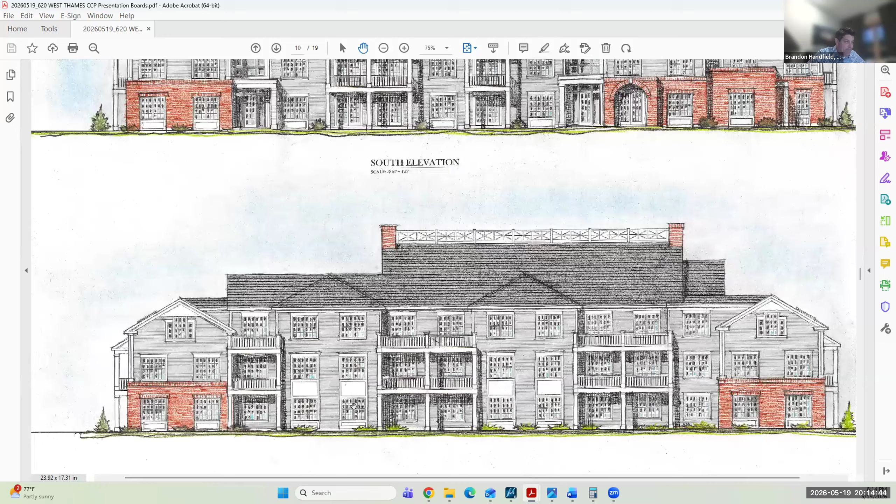Brandon, can you make the picture a little bit bigger? I appreciate you trying to replicate some of the details from the Norwich Inn, and I think this would fit in nicely. The Norwich Inn was a real treat to just walk around—it's beautiful. Any other questions?

Anything else from the applicant? Not for now. Happy to hear any comments that come up and conclude afterwards.

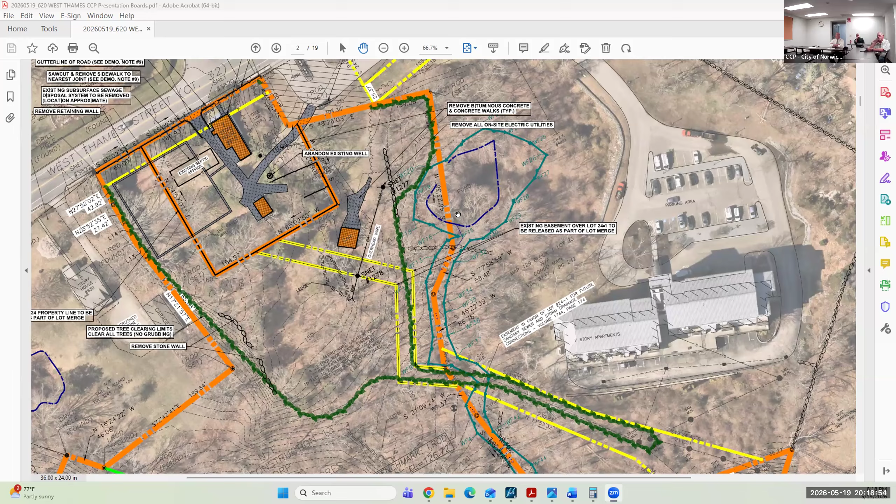Perfect. Okay, and my next question was the easement where you're coming into our driveway. Now, you're going to be using the same driveway that we have, correct? That's correct. And will the construction vehicles come through there also, or?

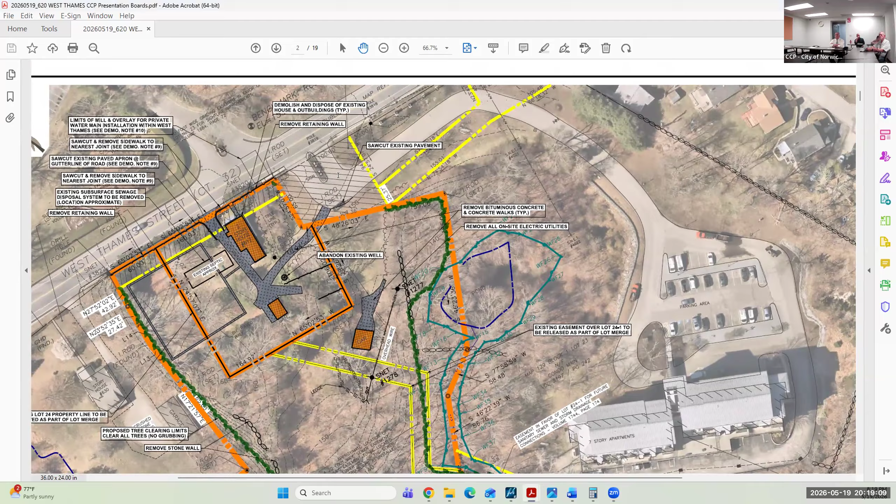As of right now, we are showing a construction entrance off of that. So we do show, and I'll go to this sheet here. We are showing a construction entrance off the back side of that property, which will be past the existing pavement.

In that easement, we do have access directly to Route 32 through the existing driveway, but we will lose that access once the building is being constructed. So we are proposing to use your driveway for construction, and we are happy to add in requirements to repair anything that happens with construction vehicles, or find an alternate solution of using the area next to the driveway. But yes, we are using that. That would be something that I'd like to discuss further with the HOA group and our manager.

The other thing I want to ask about is the increase of traffic. Has anybody looked at that, how that's going to affect things? Because coming up that hill and having double the amount of traffic coming out and in, and then having the spa, could be a problem.

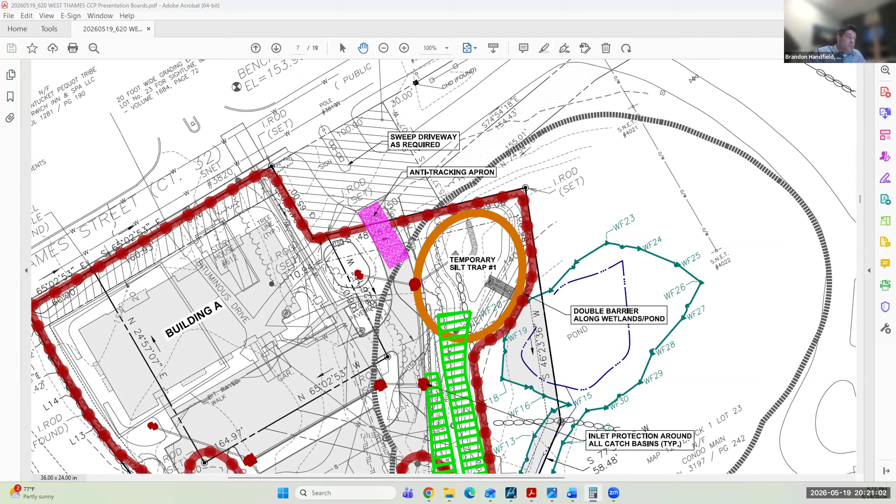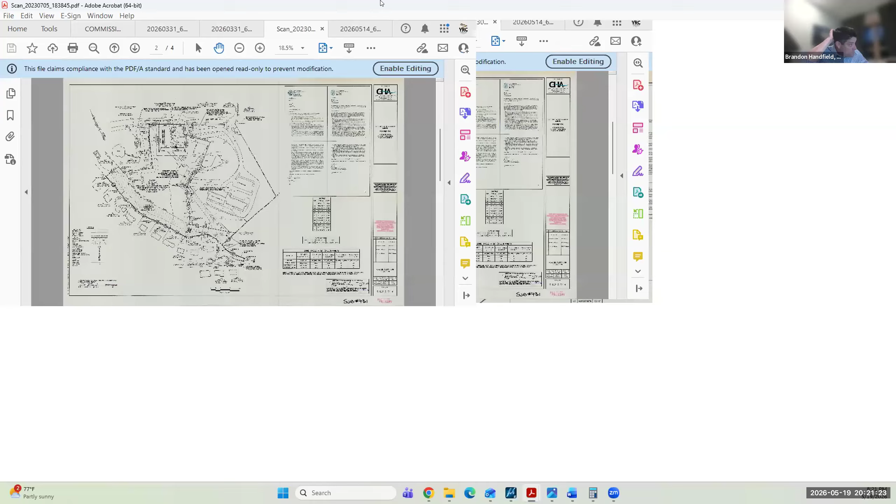But what we are proposing to do is the sightline improvements that were stipulated in the original dedication of the easement. For the record, these are filed on the City of Norwich land records, and this is the original subdivision plan. You can see the easement shown on this plan with a portion of lot 23, which is conveyed in favor of lot 24-1 for entrances, and here's that sight line. This is a 20-foot wide grading easement in favor of your property, 586 West Thames, for sightline improvements.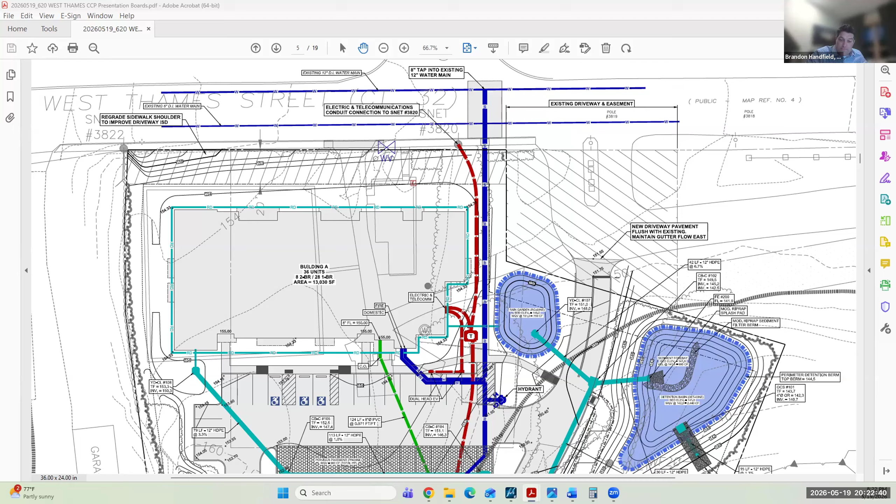So our project, we are regrading this entire frontage to provide you with improved sight lines right up to our property corner. The retaining wall will be removed. All of the arborvitaes and screening vegetation that obstructs the sight line will be removed, along with the retaining walls, and the entire shoulder graded back, so that when you're on the exit lane looking left, your sight lines will no longer be obstructed by any part of this property. That will be a substantial improvement to that existing driveway.

Okay, all right, thank you. Thank you, ma'am. Anybody else in the audience with questions? My name is Donna Callicutt, and I have it written on here, so. I am at 18 Trading Cove.

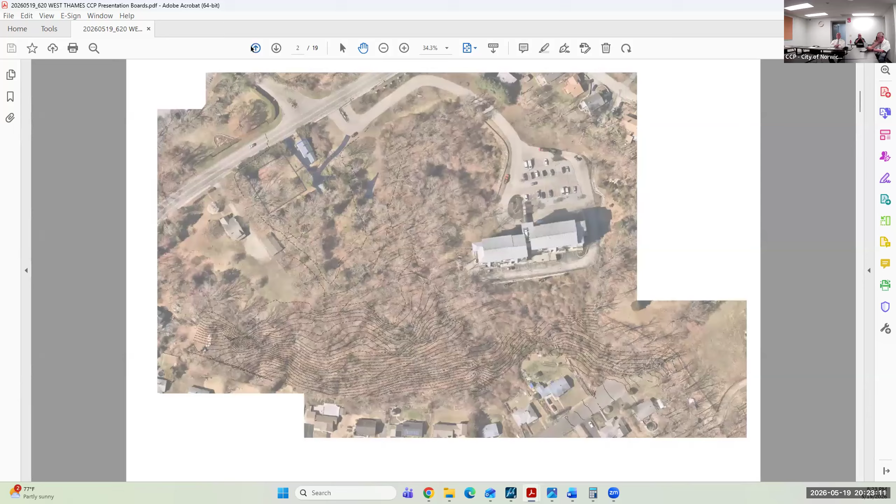So, couple of questions. The limited area for passive recreation - I'm familiar with the area you're talking about, and when you brought up a dog park, can you elaborate a little bit on that?

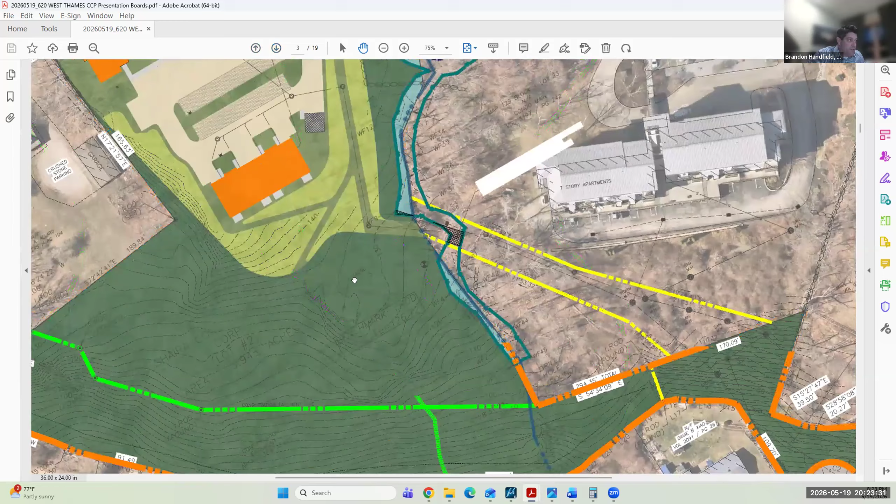Sure. So the area of passive recreation is right here, where the old barn was, and this was the backyard of that barn. There's a ledge outcropping here, so this is the flat area. What we envision would be more of a natural dog park condition where trees aren't cleared. You'd have a small fenced-in area that would not be a rigid white fence, but more like a page fence that's a little more informal, providing an enclosed space for dogs to be without being on a leash. Residents can walk their dogs down into this area. It would be shady, selectively cleared of just the underbrush and invasives that have grown in, maintaining the existing mature tree cover and having a shady area for a natural dog park.

And then a small area at the ledge outcropping, looking southwest or more west, overlooking the cove, with some Adirondack chairs or possibly picnic tables where residents can gather and sit, that's about it. We're not intending anything intense in there, no hardscape or physical improvements, more just a place for our residents to walk to that's safe and open.

Okay, my question is, you say small fenced-in area, what's your definition of small? Well, the area itself is 20,000 square feet, but that includes all the paths and the slopes above it, so I would say that's about 1/8 of an acre. I can measure it for you. Just, everybody's definition of small. No, it's a fair question. Fair question. Size of my backyard, I get what you mean by small.

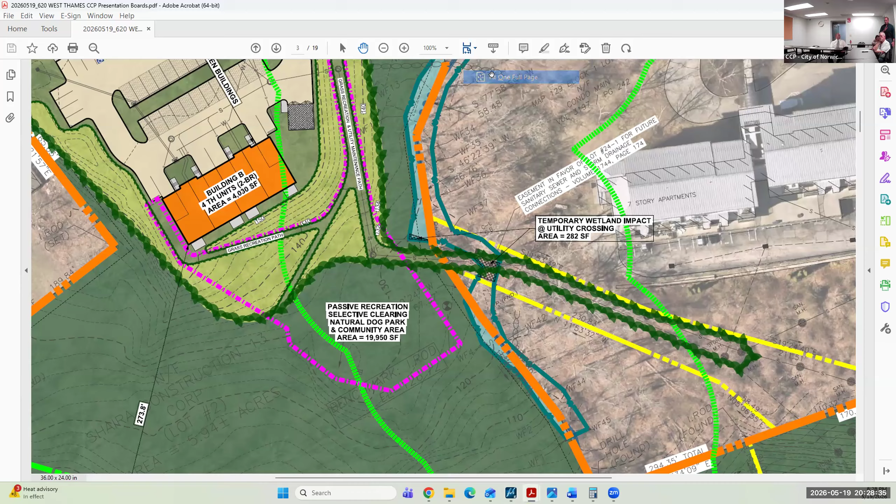Phil Biondo, here as the owner's representative for Bulwers, and on behalf of the owner, will not take any additional steps beyond what has been shown on the plan, the limits of clearing. He'll guarantee that. I will guarantee that for him. But it will be under his ownership, under construction until such time, and he'll be managing it.

But as Brandon said, these are rental units. They're not intended to be an HOA or a homeowners association. So we would adhere to the limits defined by the site erosion control measure. Okay, the next question, is there going to be any blasting of any rock, as there was at the Coveview, which incurred damages to people's foundations, etc.

I believe the question was, will there be any blasting? Yes, correct, sorry it was hard to hear. There may be.

We don't know the quality of the rock that exists, but we do know in this area there is a shallow occurrence of bedrock, and we are proposing excavation there. So there may be blasting required. If it is required, the appropriate permits would have to be obtained, I believe, from the fire marshal, and the appropriate surveys of adjacent properties would have to be performed in advance of that work. I don't personally pull those permits, but I do know when you do blasting that the surveys are required to be performed in advance.

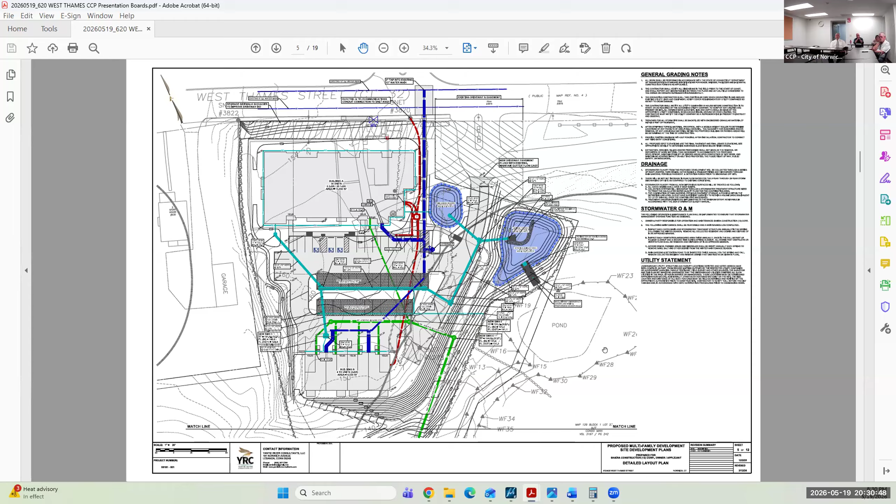Our sewer pumping station, which the Trading Cove Association sold that land to the city to build back 40-something years ago—is that capable to handle this additional sewage? It is pretty ancient. I'm just asking, I would hate to see 40 apartments and have our sewer—as we know, our sewer costs are extremely expensive in Norwich, I pay $160 a month for sewer, just for sewer. So, you know, just...

The plan set has been referred to NPU for comment and review, so they're aware of any issues that may arise, or I'll let Brandon answer. I need to jump in front of you there. Sure, no problem, I appreciate it.

So we have had conversations with NPU about the existing sewer. We are connecting to a gravity system that's on the Coveview property. Part of what we need to do is a condition survey of that sanitary sewer because it is private, leading down to Trading Cove Drive. So we will be doing basically a camera inspection of that existing system. And then if no flags have been raised by NPU, other than doing a condition survey about the capacity of that pump station, which I imagine is owned by NPU—but I will certainly bring that up with them to make sure their capacity analysis was completed.

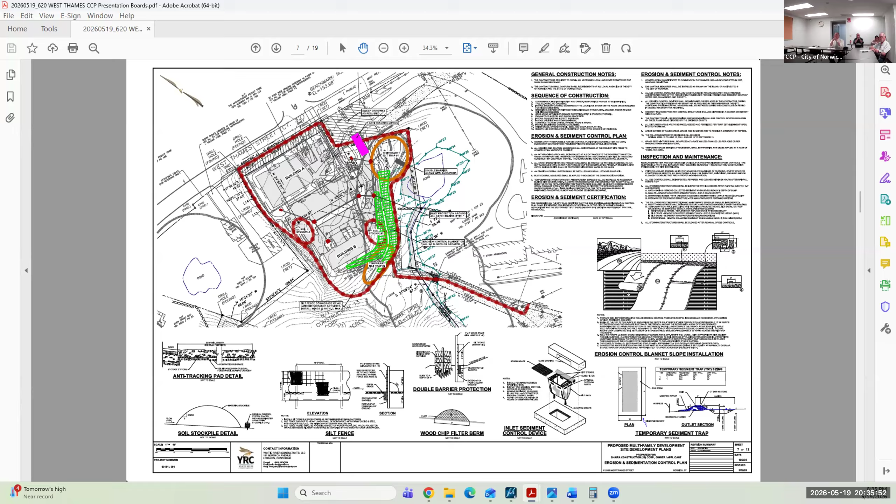Hearing none, do we have a staff report? Sure.

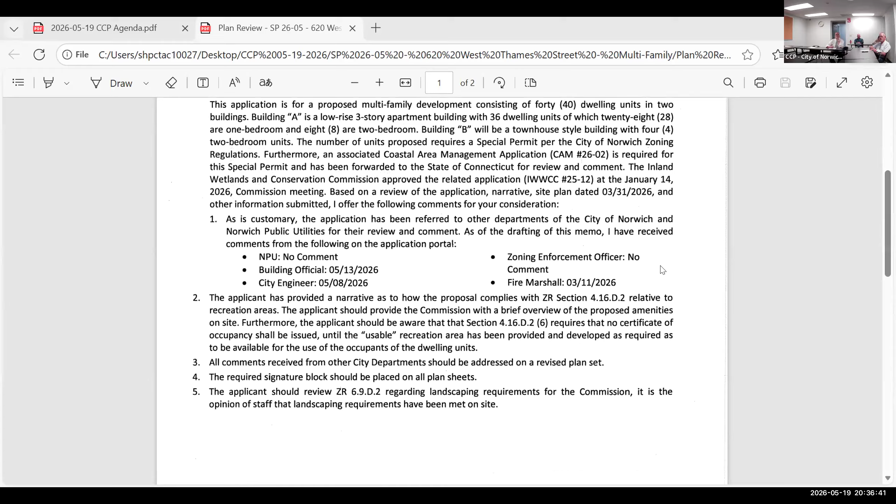Well, Brandon gave an extensive presentation. Thank you, Brandon. It was reviewed or routed out for comments. Minimal comments, nothing from the ZEO, minimal comments from the fire marshal, standard comments. City engineer is fine with approval. Anything outstanding needs to be addressed post-approval. Brandon met all of the landscaping requirements of the new zoning regulations.

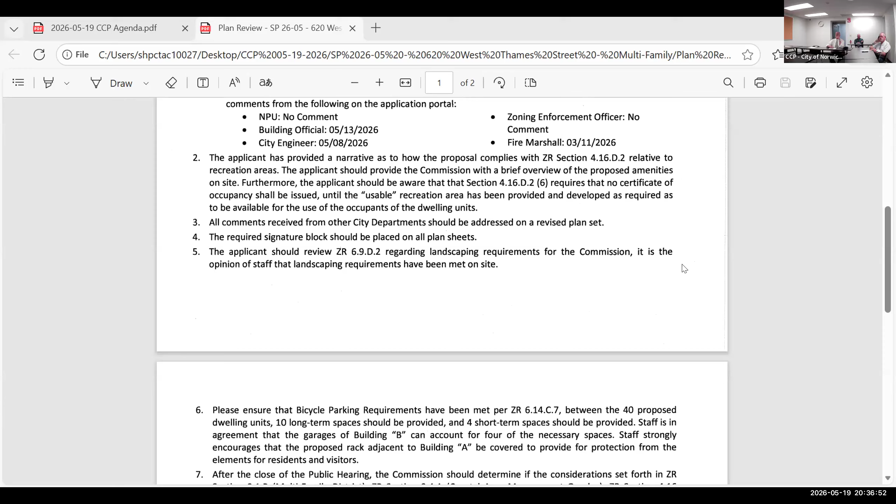My comments about bicycle parking, he said tonight, are going to be addressed. Don't really have that many other comments because they kind of met everything from the beginning. I do have a list of approval stipulations here. I will quickly show the exhibit list, for the record, and then back to that.

Dan, do you want to talk a little bit about the CAM? Yep, so I'll move the screen. It was referred to the State of Connecticut DEP for CAM review. I got that back this morning. I passed it along to Brandon. They're fine with the application. They have a short checklist that they send along, and it's been passed along to Brandon to incorporate.

So if someone does choose to make a motion for approval after the public hearing is closed, I have suggested reasons for the CAM application, which we always handle first, and then some suggested reasons for the special permit application.

Okay, all right, that all being said, I think it would be appropriate to have a motion to close the public hearing at this time. This is Ella, I'll make that motion. Thank you, Ella, do we have a second? Dennis seconds. Okay, so Ella and Dennis.

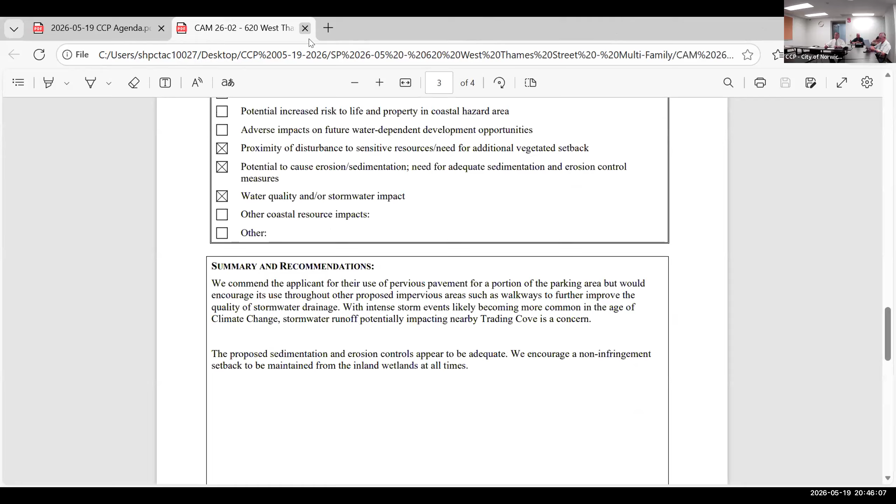Frank, I have something to add for other business. I got an email request from the folks at 89 Canterbury Turnpike. It's requesting an extension to file the Mylars. It's their first request. The subdivision number - not off the top of my head. It was the last one up on Canterbury Turnpike. Yeah, it's just a... All right, so I'll add it to...

We have it up on the screen here. We have to amend the agenda. No, no, it's under other business. Oh, okay. So there's a request for a 90-day extension. Somebody want to make a motion in connection with that request? To file - for 89 Canterbury Turnpike to extend the time for filing Mylars by 90 days.

I'll make that motion, this is Kathy. Okay, motion by Kathy. Is there a second? This is Ella, I'll second. Motion by Kathy, second by Ella. Any discussion? Hearing none, all in favor? Aye. Okay, so that extension is granted.

I have bond reductions and releases here. Okay, so further on the agenda, bond reduction and release requests. Here we go. So the first one we'll deal with, okay, the first one we'll do is the bond release.